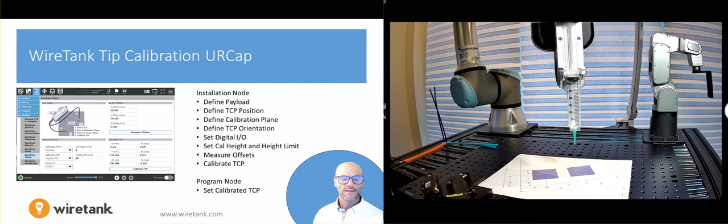So to get started, we jump over to Polyscope. The first thing to do is to set the payload. So this assumes that you start with a blank program and a blank installation. And so the first thing is that we can use this wizard to set the payload. So we will essentially go through all of these different orientations.

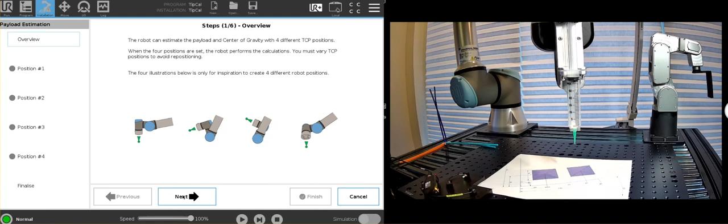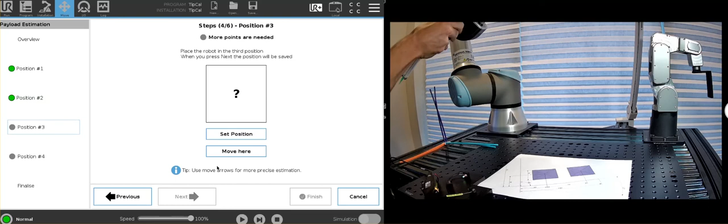So we'll say next, we'll set position, we'll say okay here, we'll go next, we'll set another position here. We're going to be using the free drive and essentially go there, say set position, okay, we'll say next, we'll pick a different position. So we'll say set position, okay, next, and we'll set finally one more position. That might be like this.

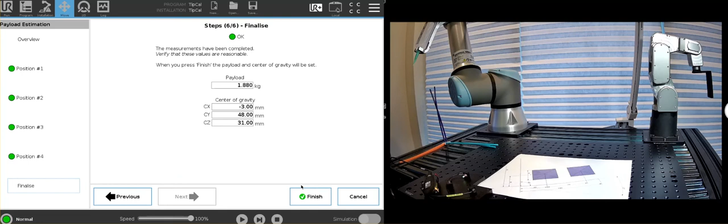And we'll say okay, say next, and that will give us the center of gravity and payload, and we can finish. So once we have that, if we go now and we free drive the robot, it should basically stay in place and it should be very easy to maneuver, but it shouldn't fall besides that because we have a well

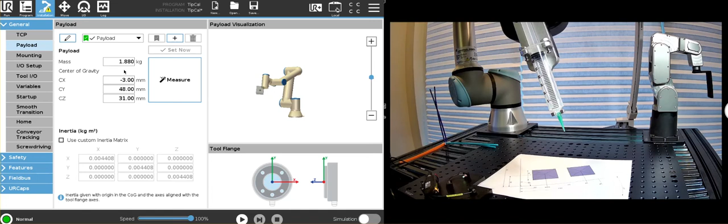calibrated payload. All right, so now we will go here to the TCP, and in the TCP we will set the position. Again, we will use the center point here. We will use that node to that little extruded tip, and we will go into that tip in the 4 different orientations so that we can set our TCP. So this will be our TCP.

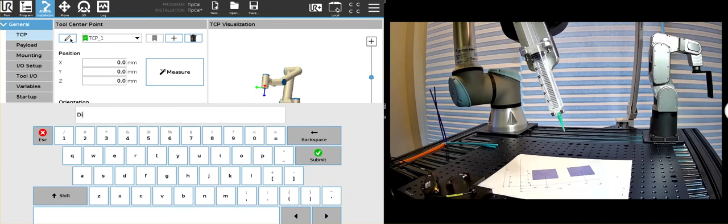We can actually create a new one, and we'll set it as the default, and we'll call this one dispenser, so that we leave the original one as it is, and that we are going to be working with this one. So we will hit measure here. We will go to set point 1.

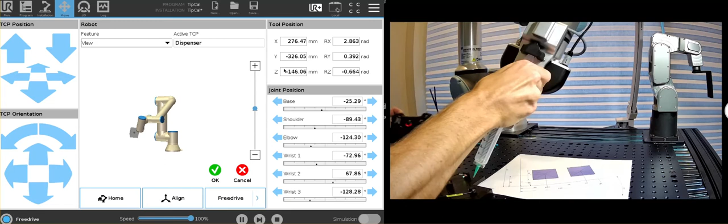And again, now we're going to be free driving the robot using the joystick. And we will start coming down here to meet up with this TCP. And so this process is made quite a bit easier with the joystick because you can, in step mode, set the steps to be all the way down to 0.2 millimeters.

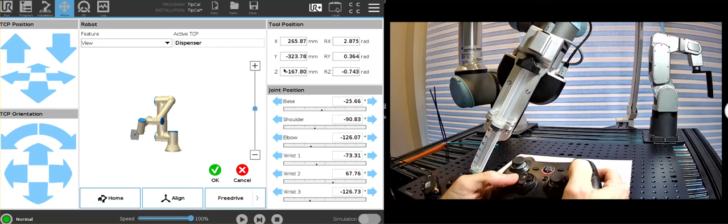So that looks quite right for that. So we will say okay. We will set point 2. So we'll go up. This next one might align so that it does it actually quite straight. And we will again come over here. And we will start going down.

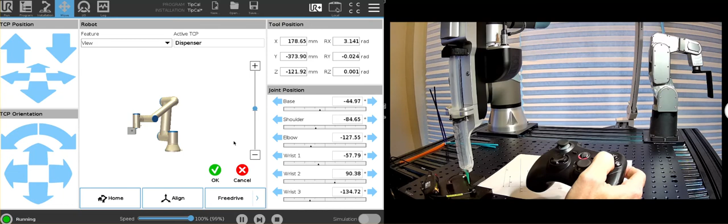And we will again come down very little by little so that we line up that TCP just right on top of that. Looks good. So we'll say okay. We'll set another set point.

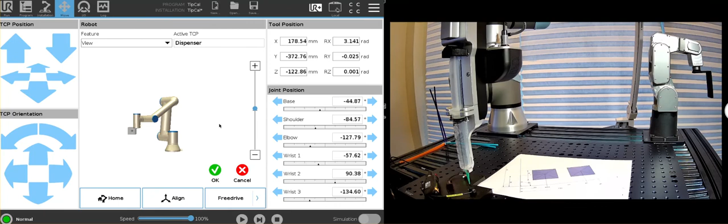So we'll go up. We will free drive. We will go over now like that. Actually, we will free drive the other direction because we already did this one. We'll go something like this. And now we will come down.

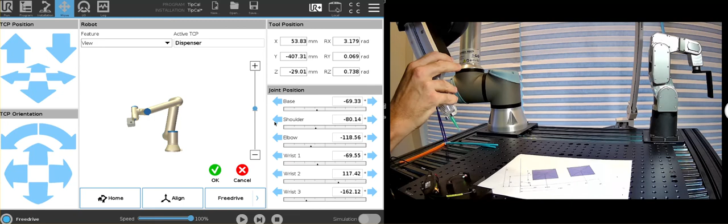Okay, we'll say okay, and then we'll do one final point where we'll come up, and maybe we will free drive it this way. Now same thing, we will come over, come down, and

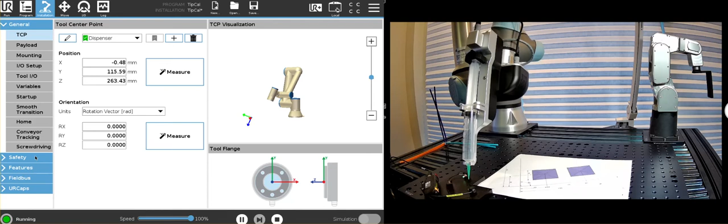okay, so now we have our 4 points, and we have set our dispenser TCP. Notice that we don't have an orientation yet. So the next thing we want to do is we're going to go up, we'll align again,

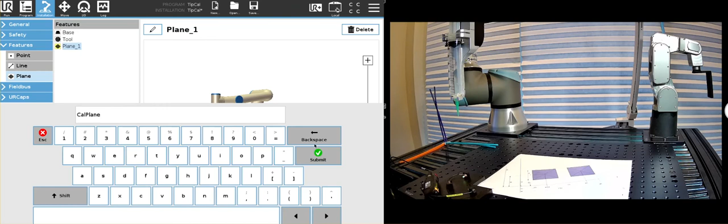and we're going to want to go here to features, and we want to set a plane, and we're going to name this plane CalPlane. We'll name it CalPlane, and we will teach this plane by going to the origin. So we will come down. So this will be our origin.

So we want our plane to be defined like this, where this orange is the x-axis, this positive y, and then the purple is the z, positive z. So we'll come down here.

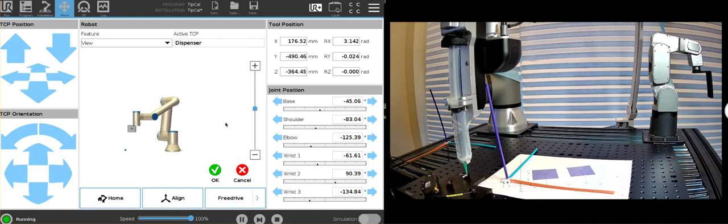And we will again line up this point here. Alright, so now that that is lined up, that will be our origin. We will say okay, next. We will set up our x-axis. So again, this was our x-axis point right here. So we'll come up, move this out of the way slightly.

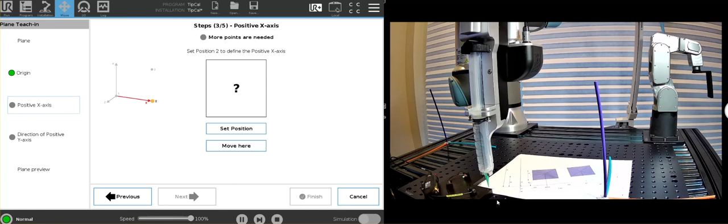So we will go down now. So that is now properly set up on the x. We will say set position, okay, next. And now we will set position on our y. So we'll go up, go over, and we'll come down.

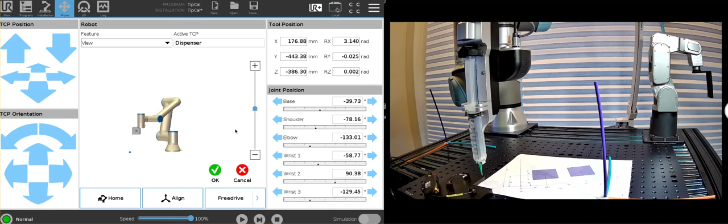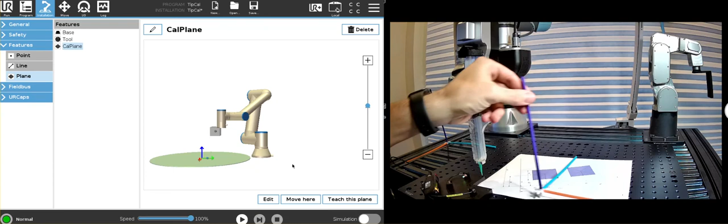So we're moving over here to match it up. Okay, perfect. So now that we have that set up, that will be our y, next, and finish. So that is now our calibration plane. But now notice that our TCP is actually like this here, right? So we want to make sure that this lines up with this TCP.

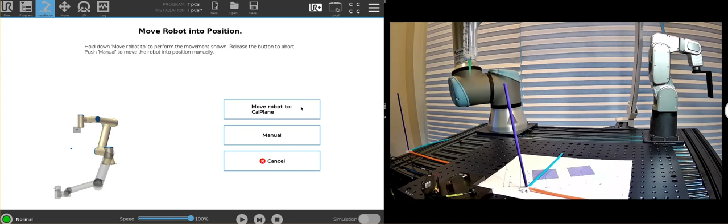So if we were to go here now and say move here, this would twist up the robot because it would keep going, it would try to line up the TCP that way. So we don't want to do that. So what we can do is say now teach this plane again. We can go back to the origin and we can say move here. This will move right back to that.

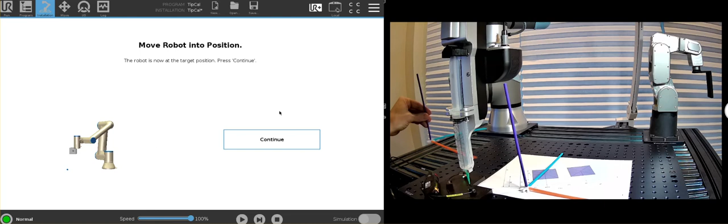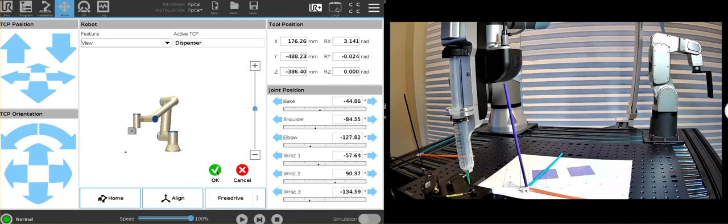And if that's the orientation in which we want the TCP in our calibration plane, so it can be like this, it could also be rotated, but in this case, we'll leave it like this, then we can actually cancel out of this now, and we can go to the TCP and say that our orientation is going to be this point in the cal plane. So this is the orientation that we want in our cal plane. And so now that's taken the right orientation.

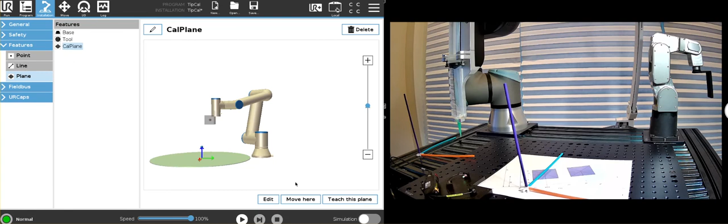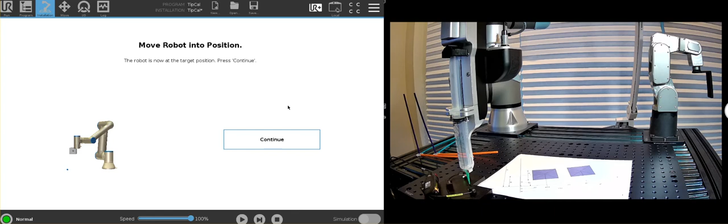So if we move up now, now we can go to our features and we can go to our cal plane and say move here, and then the robot will properly move to the origin of that calibration plane. So now we have a well-defined TCP and we have a well-defined calibration plane. So at this point, we are now ready to go into our URCap.

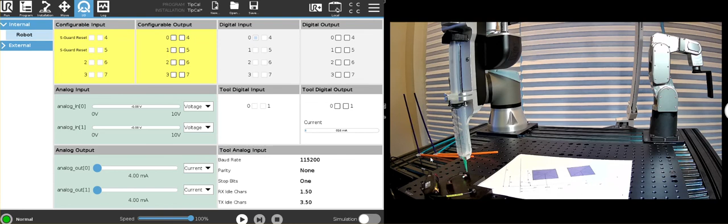Oh, the first thing is actually in the I/O. We should check that our digital input 0 is high when we don't interrupt the light beam and it's low when we interrupt it. So that's what we want. And so when we go here to our installation, tip calibration, we're going to say that digital in 0 is our sensor, cal plane is our calibration plane, and dispenser is our calibration TCP.

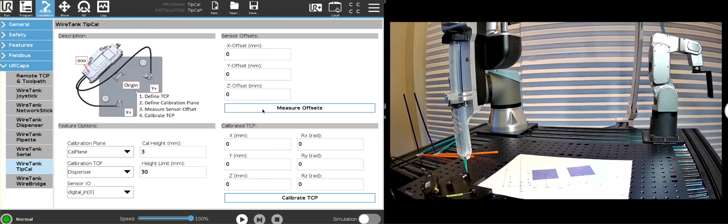So now that we have those things, we are able to measure the offsets from this TCP and this calibration plane to the light beam. So we will go ahead and say measure offsets. So it will touch off the height. It will touch off on the x-axis, and it will touch off on the y-axis. And it will have measured these offsets. So that is essentially what we wanted.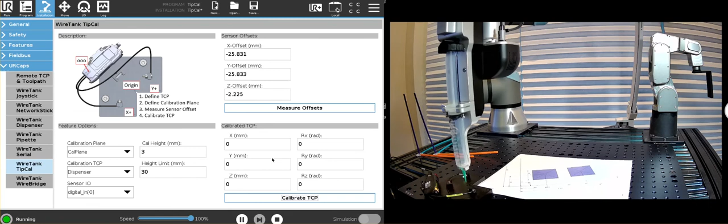So now that we have those offsets, if we were to say calibrate TCP, then the idea is that the calibrated TCP will match exactly our current TCP because it has the same TCP as what we were using before. So whatever it will populate here will match very closely what is defined in our TCP. And you will see that the TCP will have lined up with the origin.

So how do we actually go now and test this? So the first thing is, let's define a plane so that we can actually follow the sketch around.